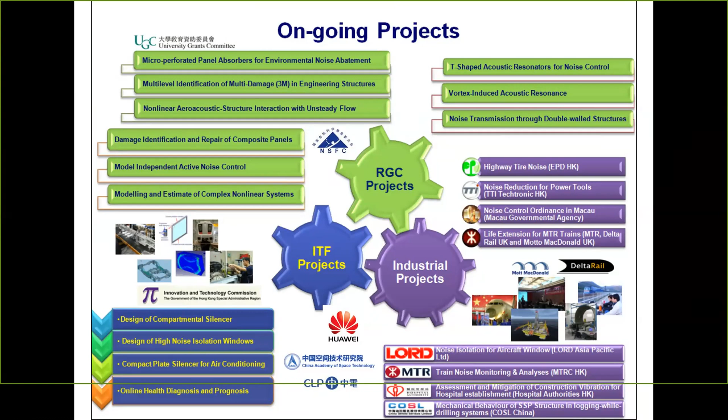We've been doing good work, and we've got lots of good support from different resources, from the RGC, the NSFC in China, the ITF, and industrial projects. Our activity really covers all the way from upstream to midstream to downstream research, as far as sound and vibration research and all kinds of problems that have value to our society.

So what's next? I just want to give a brief update of the activities going on very actively recently by various staff. I'll go through each of these pages briefly, and again I'd invite you to take a look at our pre-recorded video for more information. My colleague Li Cheng has been working on guided wave structural monitoring, and also got involved in vibration-based structural health monitoring.

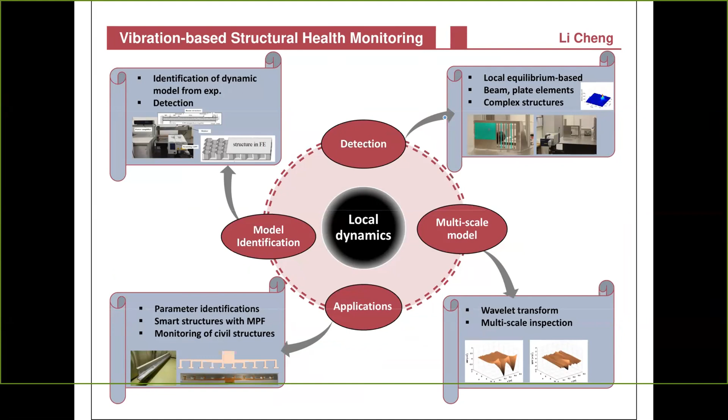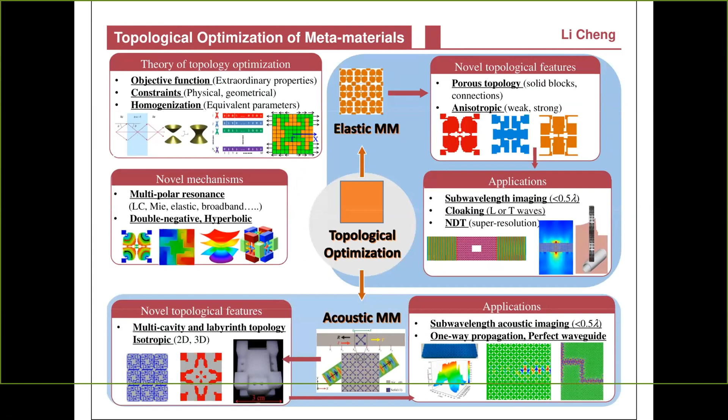Recently, he has devoted a lot of effort to the development and utilization of acoustic black hole theory for vibration problems. He also gets involved in the topological optimization of metamaterials, which is a quite hot topic recently.

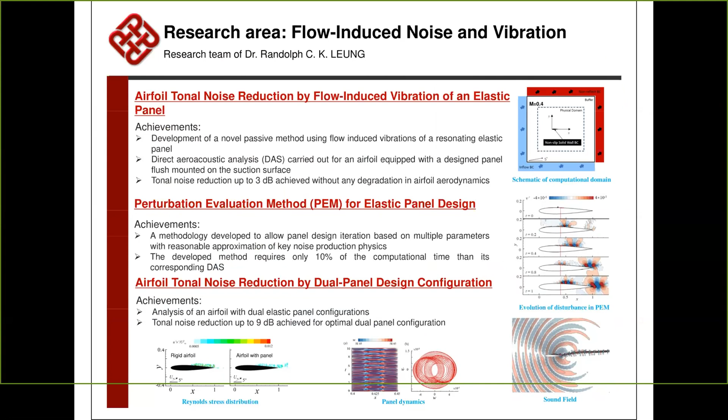I myself am involved in flow-induced noise and vibration problems. We are trying to see the possibility of using flow-induced vibration to kill airfoil noise, and also trying to develop a direct prediction model so we get a better understanding of how a porous liner works in a flow duct, and some other various designs making use of elastic panel liners.

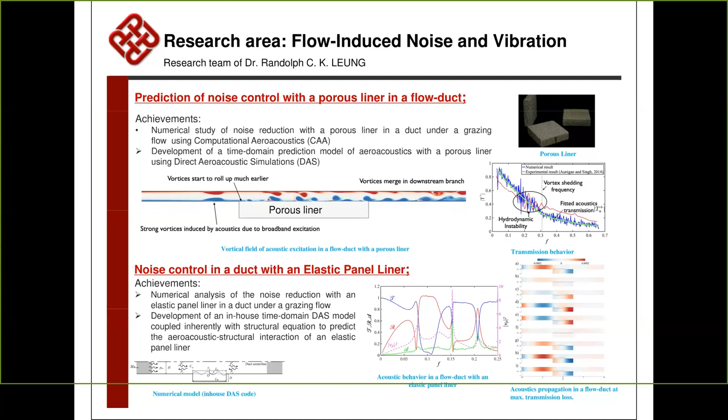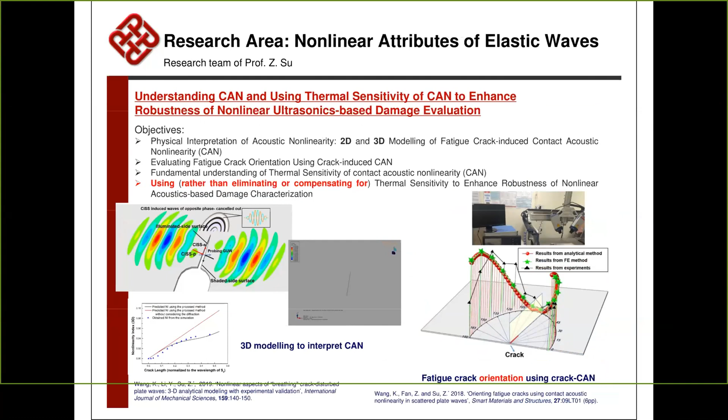Another colleague is working on elastic waves, which is pretty good for ultrasonic-based damage evaluation. This is a paper I'm not quite familiar with, but yeah.

We're also involved in building acoustics and vibration, basically as a reflection and response to the call from industry, who want a better way of predicting acoustic propagation and noise propagation, and different ways of noise control for their projects, mostly for large-scale air ventilation network design and installation projects.

They create a very great street canyon, and that will require us to do a little bit more in order to make sure that our tire noise measurement for noise planning is as accurate as we can. In such a short time, I'll just let you guys through a brief update of the activities we have been working on. If you are interested in knowing more, we heartily invite you to take some time to watch our pre-recorded video. Thank you very much for your attention, I don't want to take you guys too much time.

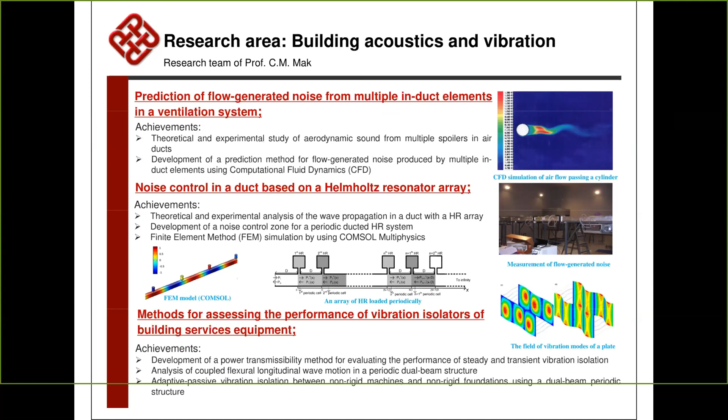Randolph, this is Gary Koopman. Nice presentation, indeed. Hi, Gary. Yeah, I have a question for your environmental team. Are the people in Hong Kong anticipating drone deliveries, and if so, are you beginning to look at drone noise in your center?

Sorry, I can't hear clearly, can you repeat your question again? Are the people in Hong Kong anticipating drone delivery, and if you're going to have drones flying around, are you going to look at this as a project within your group? You mean drones? Yes, drones, the UAV? Yes, UAV. UAVs, yes. Okay, UAVs.

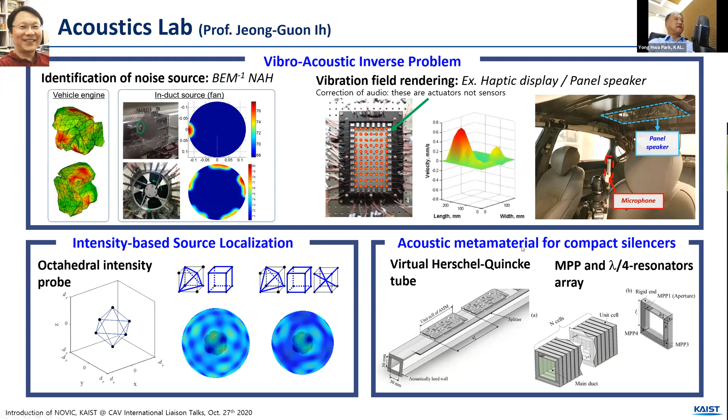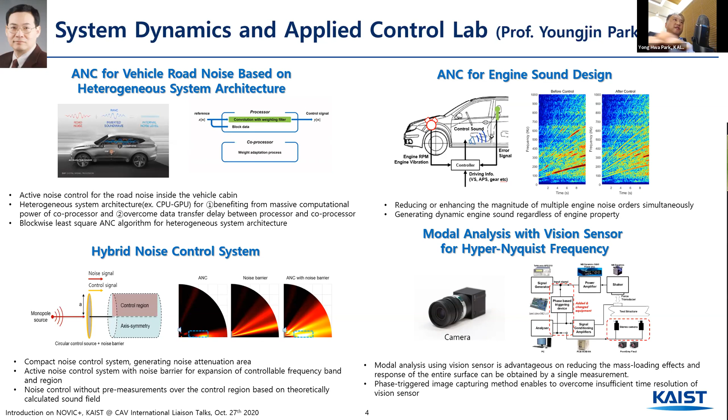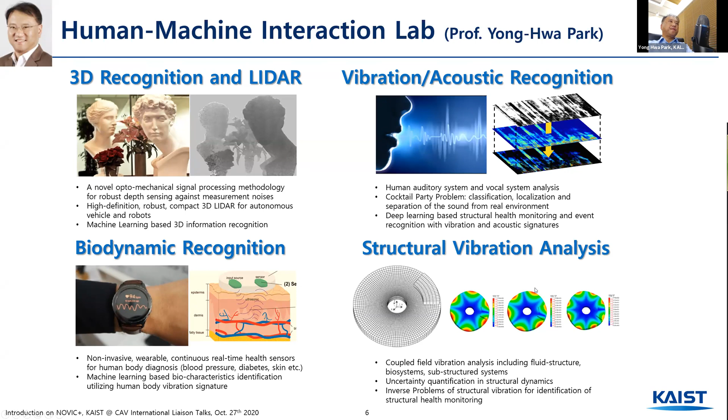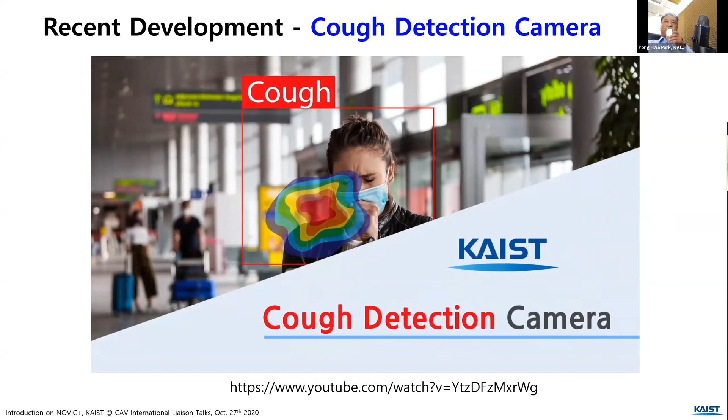This is one of my recent applications of sound classification. Let's see - this is a cough detection camera which can be used in COVID-19 situations. You can see that this is a cough sound, and then you can see where the sound comes from. So from this, we can manage this COVID-19 symptom in an acoustic way. This is now under development for hospital applications. You will see more details tomorrow.

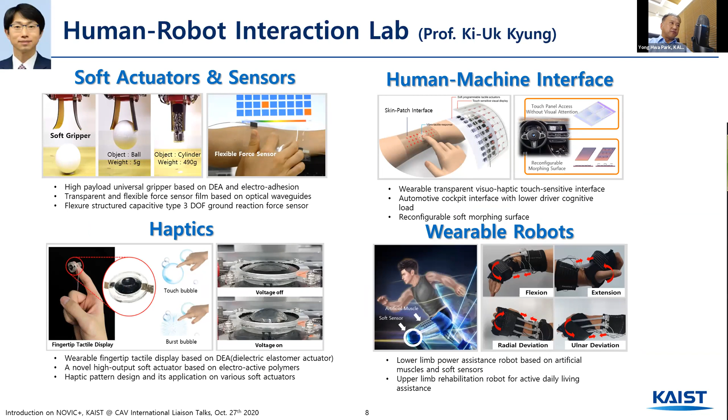And Professor Ki-Uk Kyung, he is interested in soft materials and soft material control using haptics. He's now using vibration to give a haptic experience to the users, by the way. So he's now making flexible sensors and actuators, also the control logic.

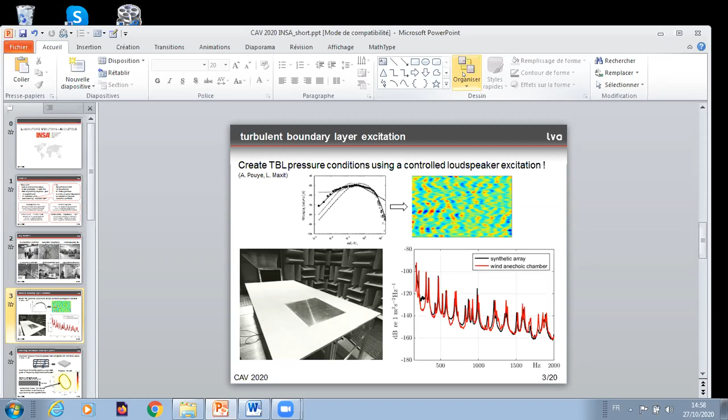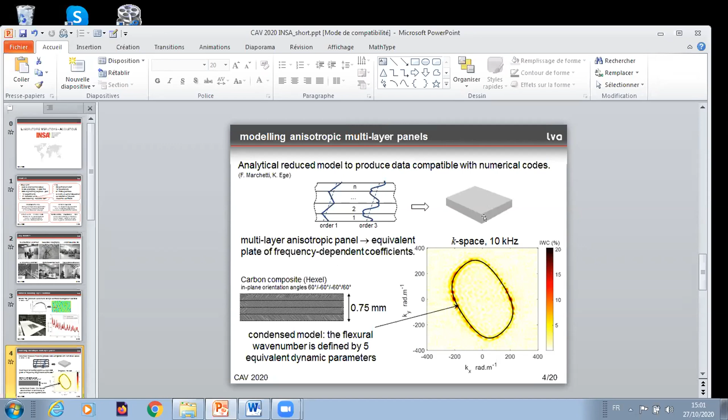For those who wish to know a bit more about the technique, they can use the video to go into it. Here is just an example of obtaining equivalent properties, which for an anisotropic equivalent plate consists in finding 5 different elasticity constants, which unfortunately are not constants, but change with frequency — so 5 elasticity parameters as a function of frequency.

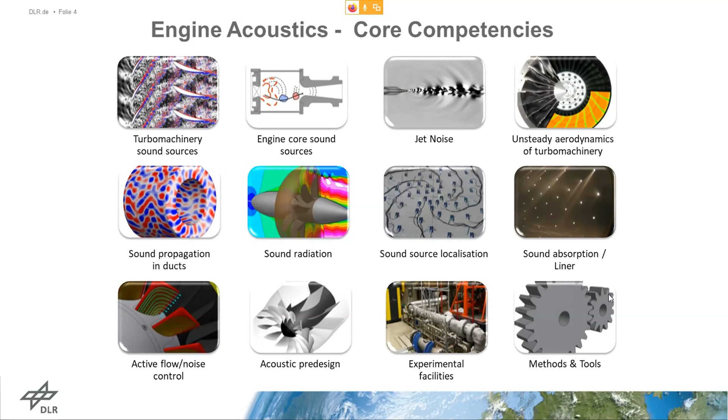So I want to pick out 4 examples which happened in the last year. In the next weeks we will get a new test facility called CRAFT, Counter Rotating Acoustic Fan Test Rig. The concept of the setup is that it's a very cheap test facility which can be driven in our department.

And it's very flexible with low operation costs. The experimental investigations are mainly on aerodynamics and acoustics. We have plenty of parameters which can be changed. We can drive this test setup with a rotor-stator configuration, as well as a rotor-only configuration.

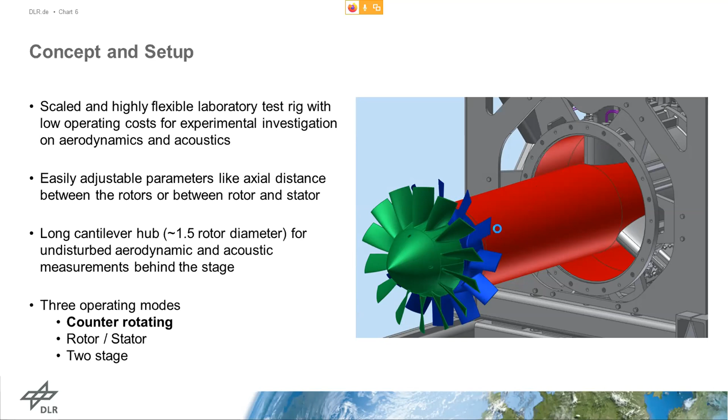There is a very long cantilever hub, about 1.5 rotor diameters, without any disturbances here. Also, the axial distance of the system can be changed. You can see here some physical data: the maximum RPM is 4,500, the relative tip Mach number is 0.33, and the rotor diameter is 452 millimeters.

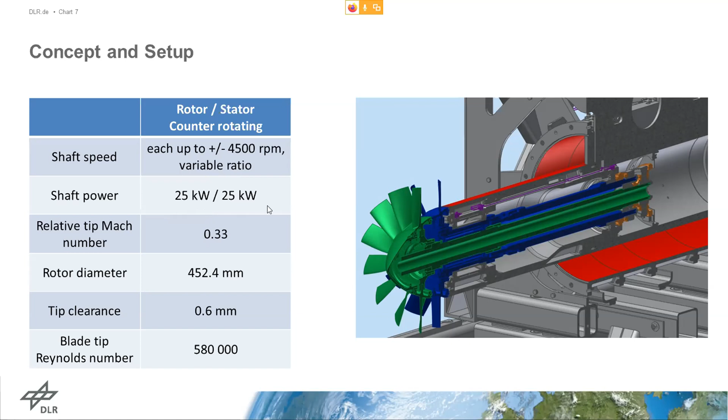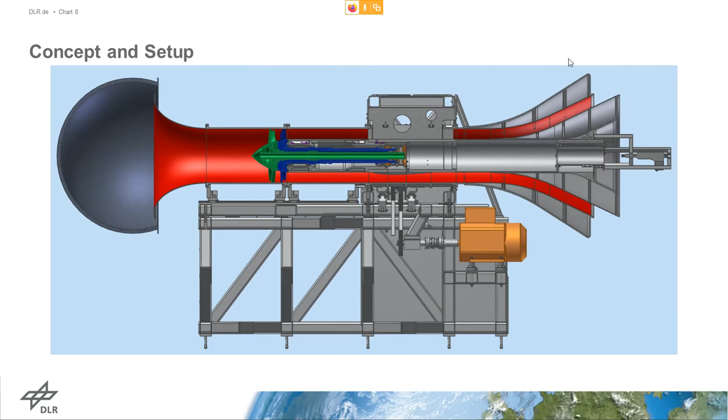So you see here the full setup. We have an inlet control device, and the flow goes from left to right. Then we have the inlet arrangement of the rotor, in a counter-rotating arrangement. The two engine motors, electrical motors, are located outside. We have plenty of possibilities with microphone arrays, line arrays, and circumferential microphone arrays. And in the end, there is an aeroacoustic throttle with low aeroacoustic reflection. You see some photographs here of that.

So we plan to have the first run in two weeks. So we are very, very excited.

So the research topic here is the influence of inlet distortions on fan noise. And also we want to investigate 3D shape optimization for low noise designs, with a focus on tonal noise as well as broadband noise. The advantage is that we use a rapid experimental validation of numerical tools here.

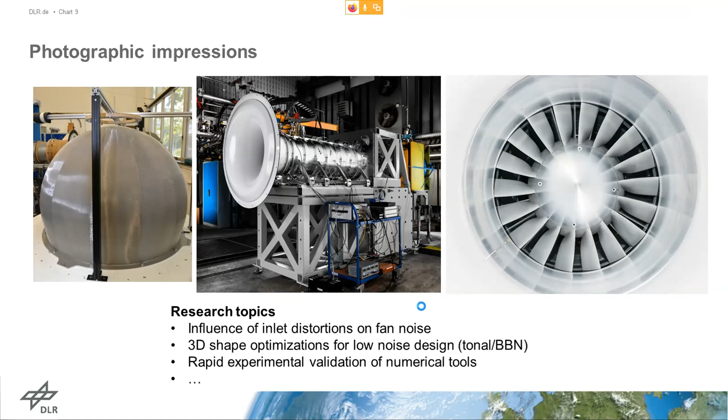That brings me to the second part, design to noise, especially for fan noise. We have plenty of different tools available for the design of aircraft fans. The easiest way is the 1D meanline method, where only very few input values are needed, and this can be used for trend studies. Then we have a 2D through-flow design, which will be coupled in future with a pre-design of the whole engine. The GT Lab is from our mother institute in Cologne.

And the 3D RANS solution, where the input data is taken from stationary flow simulations, gives the possibility of using realistic geometry and flow boundary conditions, and it's low cost in comparison to the unsteady scale-resolving simulation. The other one is the 4D harmonic balance, an unsteady solver with a U-RANS approach in our in-house code, TRACE. This is coupled with our noise prediction tool for broadband and tonal noise.

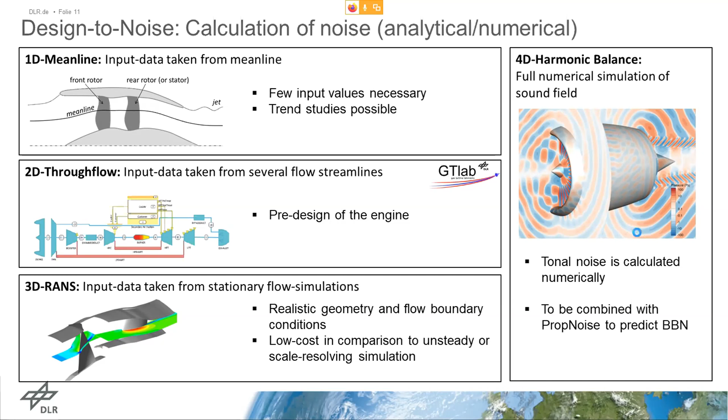So some examples of what can be done with these tools can be seen here. This shows an optimization of an outlet guide vane stage, with a rotor blade and the outlet guide vane. We have a target function with three different point optimizations, focused on the cutback bypass overall sound power level, the approach bypass overall sound power level, and the cutback efficiency.

Our optimization tool creates several samples, probably up to 100 different ones. There's an automated geometry generator, and afterwards it's calculated by the RANS approach and the noise prediction tool.

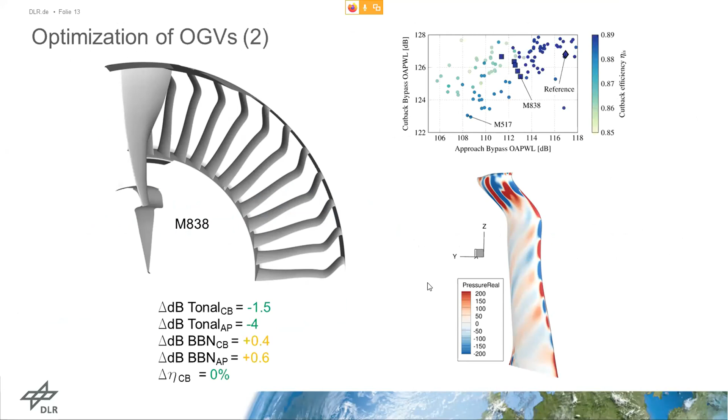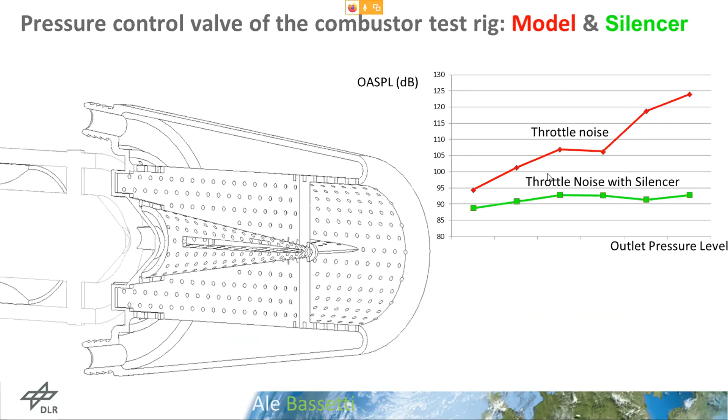And the last one, which we just started, is the influence of propeller blade counts on drones and quadcopters for the perceived level of noise annoyance. So we'd like to change the number of blades, speed variation, and the blade shape, and to observe the relative frequency shift and the beat noise.

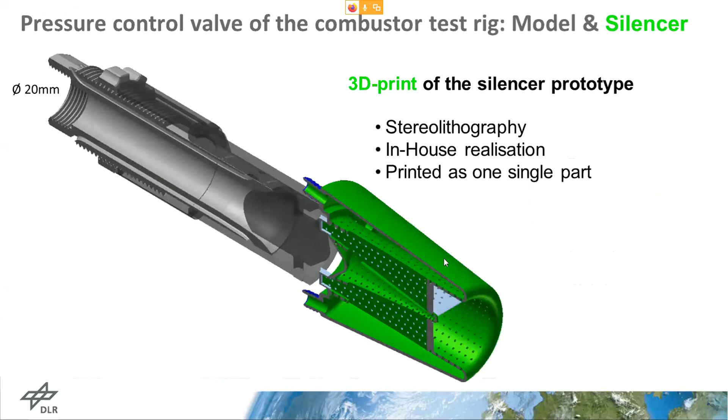Hey Robert, this is Jose. Great hearing from you. Yes, hello. Is your shape optimization applicable to rotor blade designs, thinking about UAVs and potentially coaxial configurations?

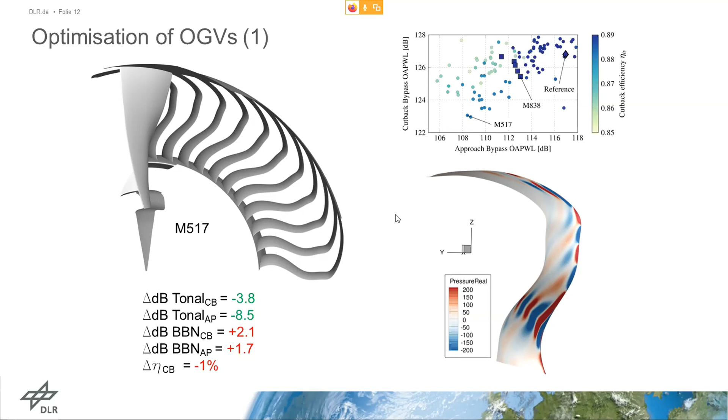In principle, yes. We are part of the Propulsion Technology Institute, so we are mainly focused on aero engines, but I don't see any reason why it shouldn't be used for other applications as well. And you see the drone project here goes in the same direction. Of course, we want to use this technology also for the design of the blades here.

Excellent, I'm gonna go ahead and hunt for some of your papers then. Very good, thank you. Yeah, please contact Lars Enghardt for that. All right, excellent. Thank you very much again, Robert.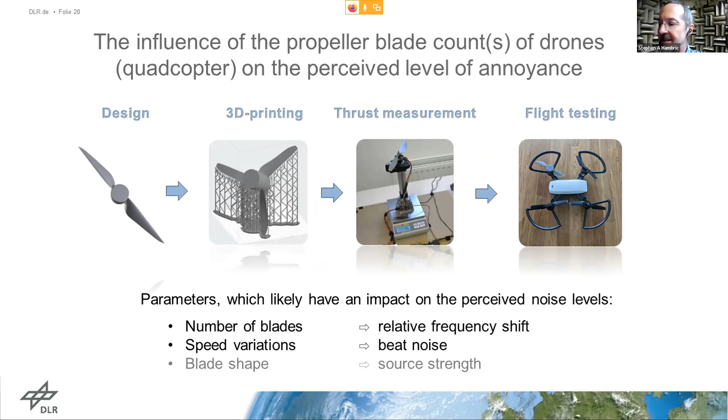Ah, very nice, Filippo. I think they're a little bit older now than when I saw them the other day. Looks like a noise control application right there.

Okay, we can see the screen just fine. But we can't hear you, I'm afraid. Sorry, I was there talking away all this time, thinking you could hear me. Hello, everyone. We've all done it. It's fine, thanks, go ahead please. Can you hear me okay now? Yep, you're good. Excellent, thank you.

So my name is Filippo Fazi, and I'm a professor and also director of research at the Institute of Sound and Vibration Research. I'm going to give a very brief highlight of some of our research at the Institute, and also focus a little bit on my own research, but of course all the detail is in the recorded presentation I gave. For those of you who do not know us, we are here in the sunny south of England. In fact, Stephen, thank you for kind of promoting it to Australia, but the British weather reminds us all the time that we are in England here—lovely country in any case.

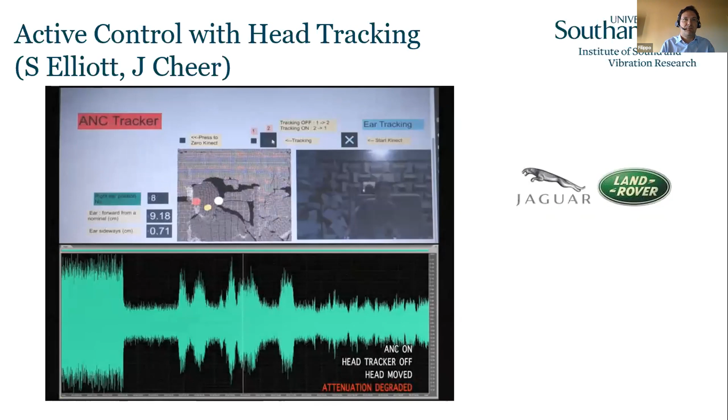What I think is interesting is to talk briefly about the theory, because the way we do sound field control for audio reproduction is very much related to the theory of acoustical holography. So very briefly, from a mathematical standpoint, let's assume we have on this red sphere a distribution of loudspeakers.

We want to control the sound field, to reproduce a target sound field on the surface of this smaller blue sphere, which ensures accurate reconstruction in the interior as well. The way we do it is to formulate a so-called forward problem that relates this function Qy, the source distribution on the external sphere, to the pressure on the smaller blue sphere.

In this case it's an integral equation, because we assume a continuous distribution, but it can also be discretized. Once we have a target sound field P, we need to define the required loudspeaker strength, the loudspeaker signals to reproduce it. So we need to invert this integral operation.

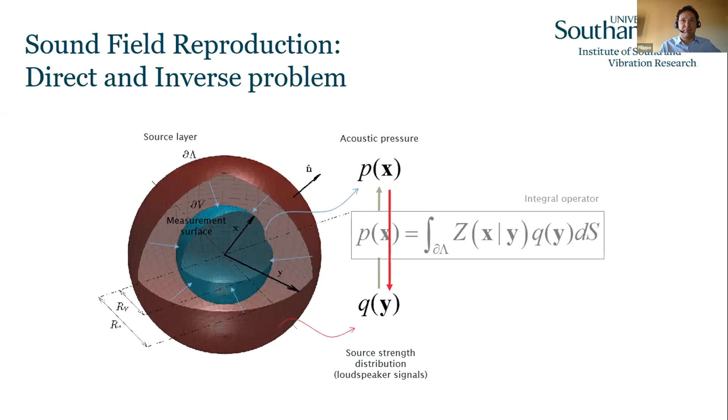This is indeed very similar, if not identical in many ways, to acoustical holography. What we do shares a lot of similarities with it, with the difference that for acoustical holography a solution always exists - it might be hard to find or calculate, but it always exists because it's generated by a physical problem. Whereas for sound field reconstruction, that might not always be possible, especially if you ask something unreasonable in terms of the target sound field PX.

Another area of interest now relates more to virtual acoustics, about the delivery of accurate sound to the left and right ear of a listener using a loudspeaker array. This is called crosstalk cancellation.

A simple way of explaining it is like creating virtual headphones. If you are capable of reproducing exactly the desired signal at the left ear and right ear of a listener, then we can create ideally any acoustical illusion. It is in fact virtual acoustics, as it were.

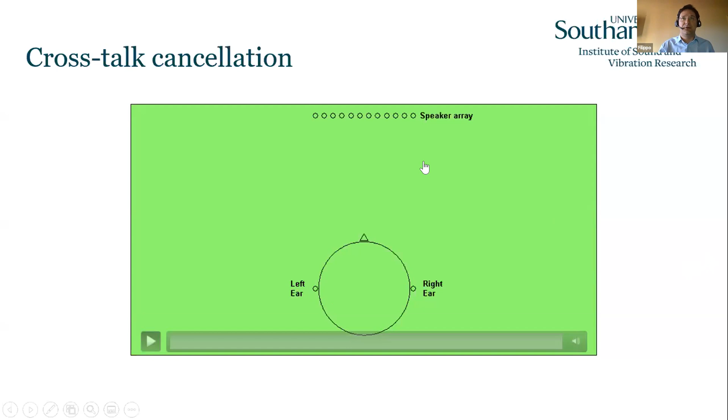As you can see in this example, here on top is a model of a loudspeaker array. The loudspeaker array is focusing a very sharp beam of sound on the left here, and trying to minimize the acoustic energy on the right. By doing so, we can independently address the signal at the two ears and create a very, very convincing acoustic illusion, including sound coming from behind you or far to your right, even though the loudspeaker array is in front of you.

The main limitation here is that as soon as the listener moves from the so-called sweet spot, the sound beams are no longer focusing on the ears of the listener, and the acoustic illusion falls apart.

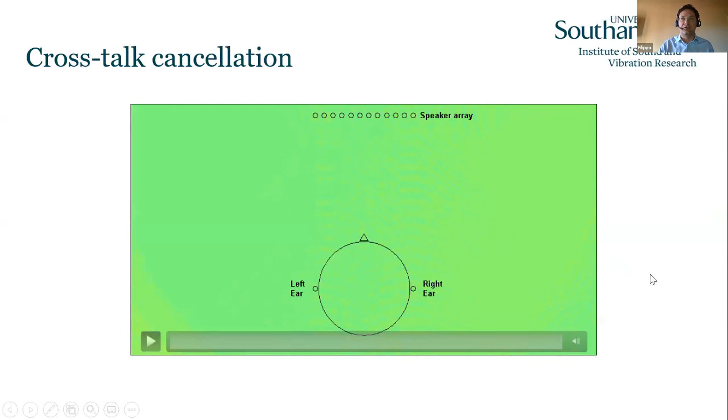This is why, in this case, we are using a camera. This is one of the prototypes generated by one of our startup companies, Audioscenic. We have included a small camera in the loudspeaker array, so when the listener moves, we can track the listener.

In this animation, you can see here on top a loudspeaker array, and here the two ears of a moving listener. In blue and red, you can see the beam patterns of the beams for the left and right ear. When the listener moves, because the camera can track them, the two acoustic beams that deliver independent sound follow the listener, thus consistently providing an accurate 3D image.

That was a bit of a rush, I apologize, but I hope I did well in terms of timekeeping. All the relevant details of this presentation are, of course, in the recorded presentation. Thank you, happy to answer questions.

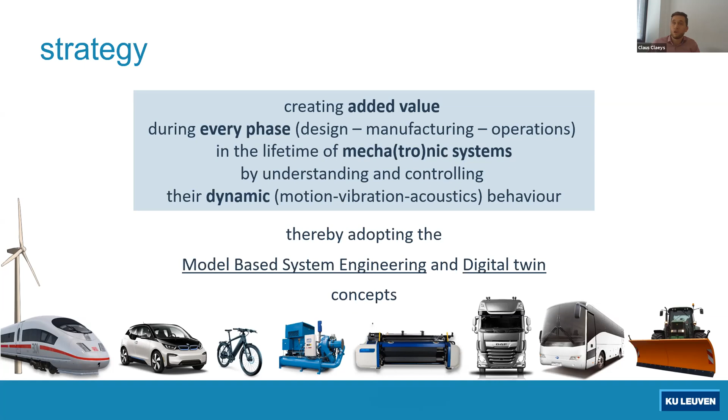So in everything that we do, we try to combine preferably physical behavioral models with measurement data and try to get additional insight into the system, to better understand that system and to come up with better solutions or better control systems. That can be from a condition monitoring point of view, or from a lightweight structure design point of view, or everything in between.

That's also something represented in the development and validation platforms that we invest in. So we have quite a wide range of different experimental setups, going from shaker tables—this is a 6DOF hydraulic shaker table—up to acoustic characterization equipment. In everything we do, we try to have validated models, or at least good estimates of the input forces, such that we can truly update our models and go that next step in combining models with experimental data. That also means we invest heavily in modeling software to get the most out of our experiments.

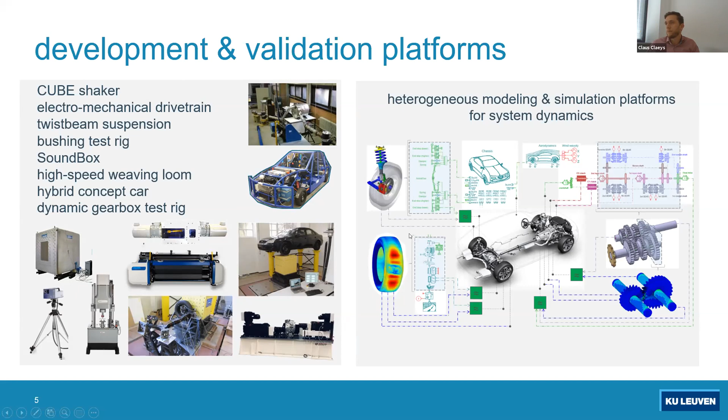If you look at, or listen to, the presentation we recorded, we focused on two main activities, and I will briefly highlight them. One had to do with model acceleration techniques, which is a bit linked to what I said earlier, that we're trying to get the most out of the combination of the different activities in our group.

Here's an example of gear NVH. As you see in our activities there, we start from the source with quite elaborate gear models or bearing models that can go from full finite elements up to more lumped 1D parameters. Those models we can combine with our flexible multi-body toolbox.

And then that one we're now trying to couple with our acoustic and vibroacoustic models, going from finite element to boundary element methods, in such a way that we can go to a full characterization of, for example, gear whine—so we can see at the most detailed level what's going on, what is the cause of this noise, and how that actually influences how that noise is perceived by the receiver, such that we can model everything from source up to the pressure at the ear location of the passenger in a vehicle.

And then besides doing everything in models, we're heavily investing in also being able to check the different levels of our models with testing.

So that can go from gearbox housing component testing to see where our structural model is on point. We're also building gearbox setups where we can characterize those gearboxes and see where our source models are correctly predicting the transmission errors, whether we actually see that popping up in reality. And then, of course, the goal is to do full system testing too, to put that gearbox in a vehicle and test the levels at passengers' ears, see whether we capture the trends we predicted in our models, and then use that data to do model updating and close the full loop.

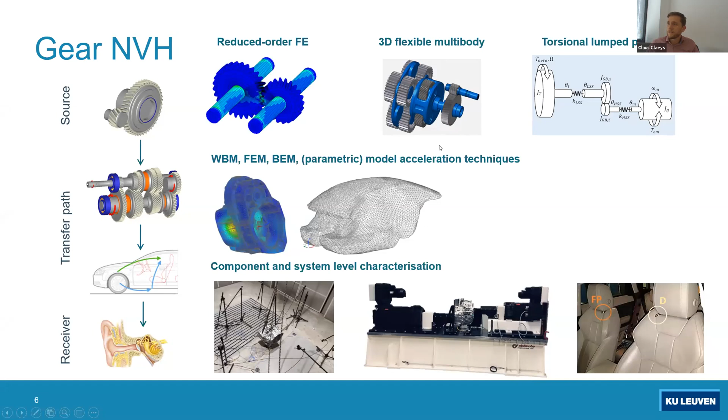In order to enable that, one of the things we have to invest heavily on is model acceleration techniques. In the talk that we recorded, we go a bit deeper into the different strategies we follow with finite element and boundary element methods to get those acoustical and vibroacoustic models better up to speed.

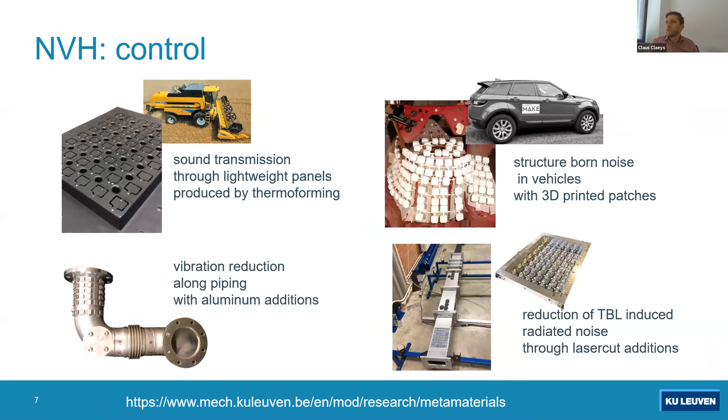Next to closing the loop between models and experiments, we're also still investing in NVH control itself, in new materials or material structures to get better vibroacoustic behavior. In past editions we almost always had a small section on our metamaterial work focused on vibroacoustic metamaterials, where we use structural stop-band behavior to achieve zones of strong vibration or acoustic attenuation. Recently we also moved more towards the area of acoustic metamaterials.

One of the recent works is on phase gradient-based materials, where using the generalized Snell's law, it's known that if you have a certain phase gradient over a material, it should theoretically be possible to have no reflection and no transmission through the material. By using a discretized approach of that phase gradient, we can achieve foams or foam assemblies with broadband absorption characteristics, both broadband in frequency and working over a broad range of angles of incidence. That's one of the new things we're working on.

In the presentation itself, we also go a bit deeper into how we do the characterization of these materials and how we built the setup for that, which was also a bit less trivial than you would first think.

So that was, in a very short nutshell, the activities we highlighted in our talk and what we're about. If you'd like more information, please visit our website. We also recently made an overview movie that visualizes the activities we do, which is also nice to see. So that was a short update from my side, Steve.

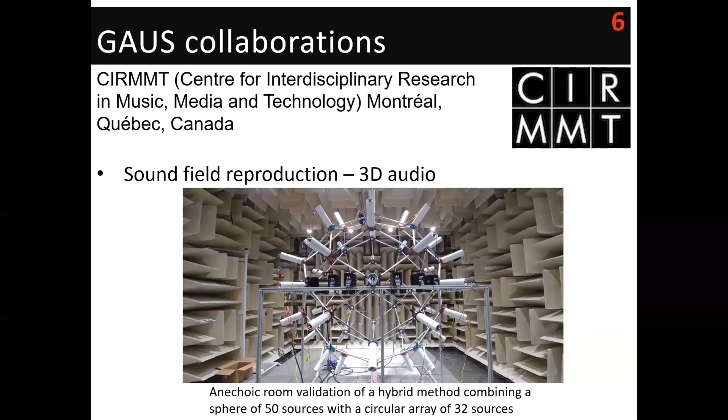So we're setting up - this is a work in progress but will be shared with the CAV - binaural recordings again of skilled musicians, for several reasons: to make musicians aware of what binaural or spatial recording is, but also to be able to explain to people what it involves and what it brings into sound perception and possibilities.

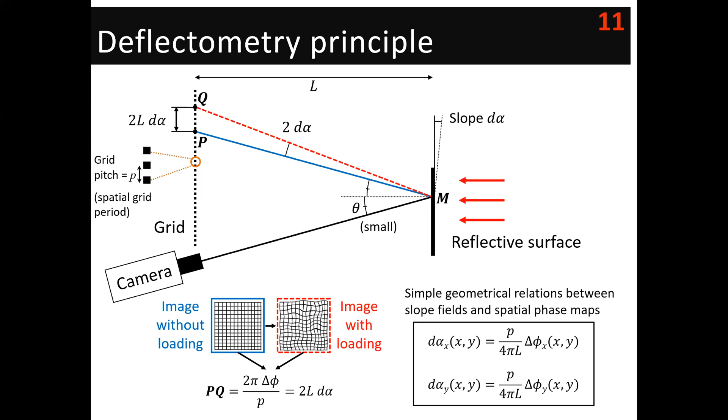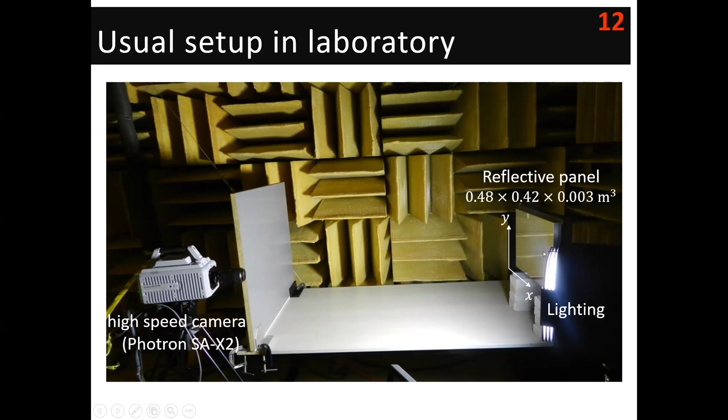In the lab, it takes this form: a high-speed camera on the left, lighting on the right, a reflective panel simply polished using car body polishing techniques, a printed grid, and a recorded image on the high-speed camera.

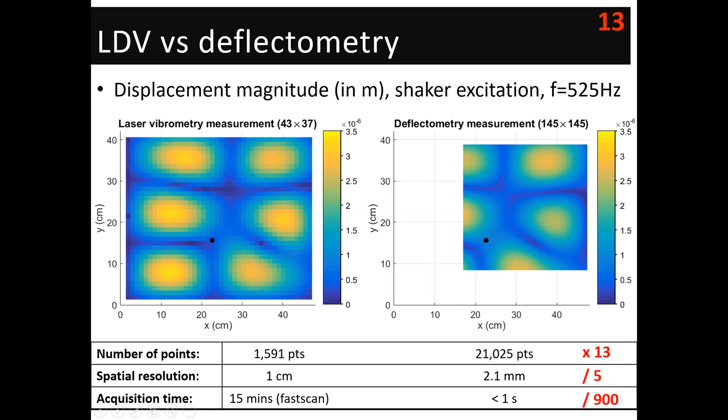I'll skip the details, but when you compare a measurement on a panel between laser vibrometry and deflectometry, generally the deflectometry outperforms in terms of number of points, spatial resolution, and acquisition time. But the problem is you need a mirror-like surface to apply deflectometry.

So you can use reflective mylar. This was studied by Gary Rhoades in a master's thesis at the CAV graduate program. But another solution is to move to infrared deflectometry, because of the Rayleigh criterion, which relates the wavelength of light and the surface roughness, giving an indication of what the surface roughness should be compared with the wavelength.

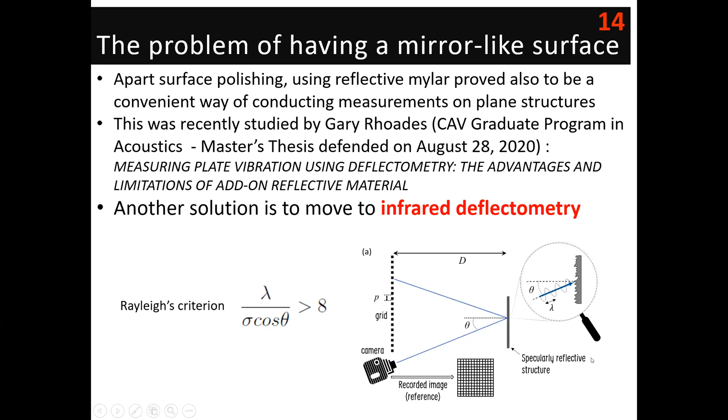In the visible spectrum, the wavelength is approximately 500 nanometers, so you need a small roughness of 60 nanometers to achieve specular reflection. In the long infrared spectrum, the wavelength is about 10 micrometers, and the required surface roughness is largely relaxed. So we decided to test this on a simple test case, comparing visible and infrared deflectometry at GAUS last summer.

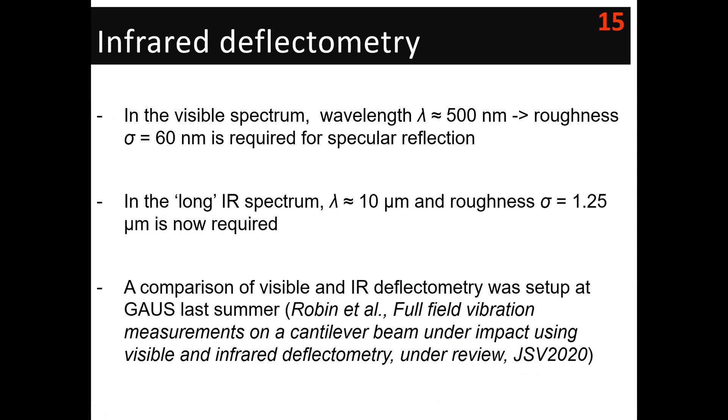The test case is simple: a cantilever beam under impact, with impact applied at a specific point. One side has a mirror-like finish, and the other side is left unprepared. We set up the method for these two cases.

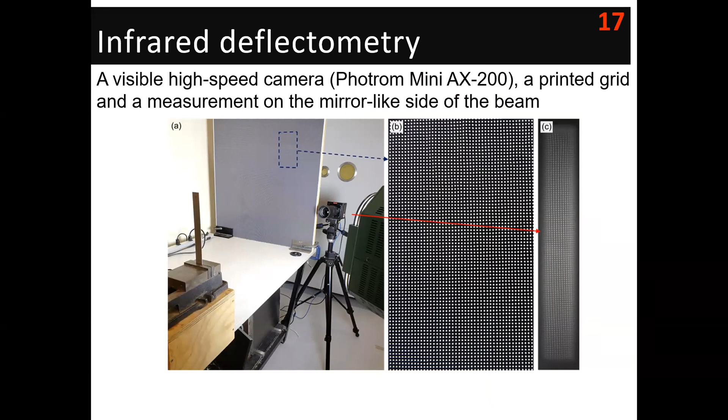The first case uses a high-speed camera, a printed grid, and measurement on the mirror-like side of the beam, giving high-speed and largely refined spatial measurements. Then we tested the same setup using an infrared high-speed camera, a thermal grid, and measurement on the unprepared side of the beam. So what is a thermal grid?

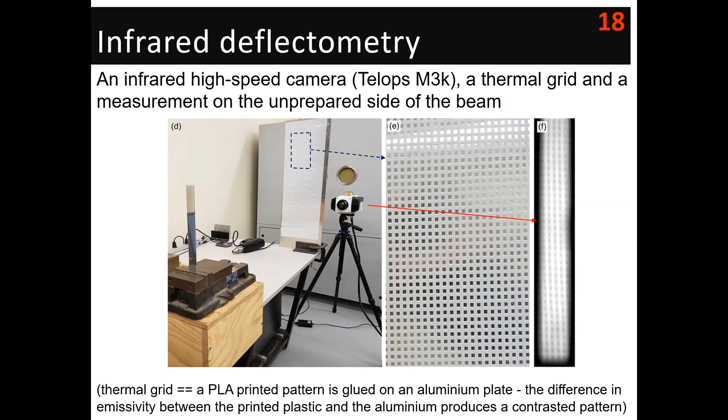Briefly, it's a grid with contrasted emissivity between the two elements that compose it. In this case, it's PLA and aluminum.

So to summarize, we made the first comparison between visible and infrared deflectometry, showing it is possible to use infrared deflectometry on common materials. What's really intriguing for the future is that all the established methods and algorithms for image processing are identical, making it easy to move from one to another. So the range of materials and surfaces that can now be tested using deflectometry is clearly broadened. I'll stop here.